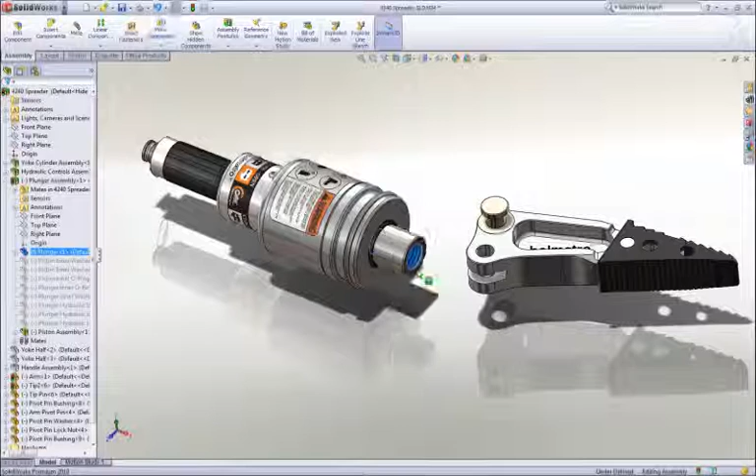We'll create a part, assemble several parts, and create some drawings. We'll start by designing a new rod-end part to connect the piston rod to the spreader arms.

The basic building block of a 3D solid model is a sketch, and sketching in SolidWorks is extremely easy and intuitive. Using a mouse gesture, I get access to my most commonly used commands. Draw a slot, add some dimensions to establish its size, and then drag the center of the slot onto the origin to locate it.

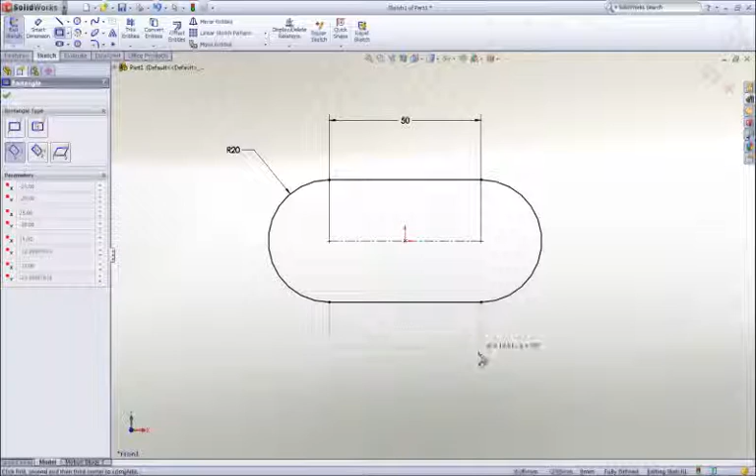Next, a rectangle is drawn using one of the many sketch tools, and then we will add a couple of circles to hold the link pins. The two circles should be the same size, so a quick window selection reveals a pop-up toolbar, and an equal constraint is added to lock their size together.

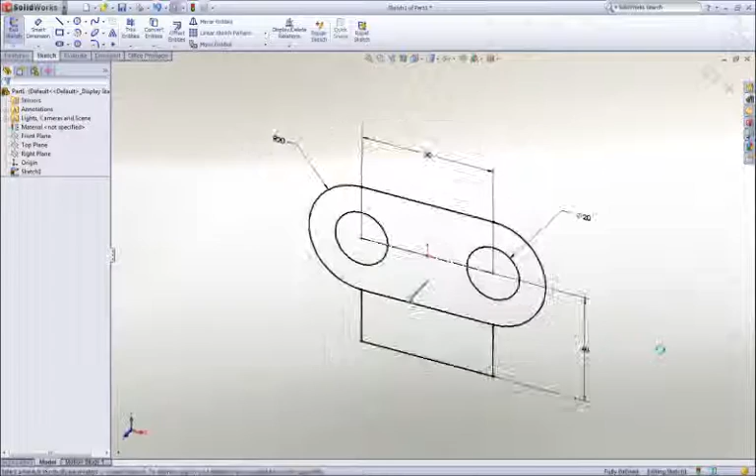Notice that as I work, all of the commands and tools are right at my cursor. We call this our heads-up user interface, which is designed to keep your focus on the screen to make you more productive. Now that this 2D sketch is finished, let's make it 3D by extruding it.

It can be extruded in either direction, or in this case we will extrude it 40 millimeters, about the midplane. To smooth some of the sharp corners, we can add some fillets. Their size can be graphically manipulated on screen, or we can key in a dimension to add some precision.

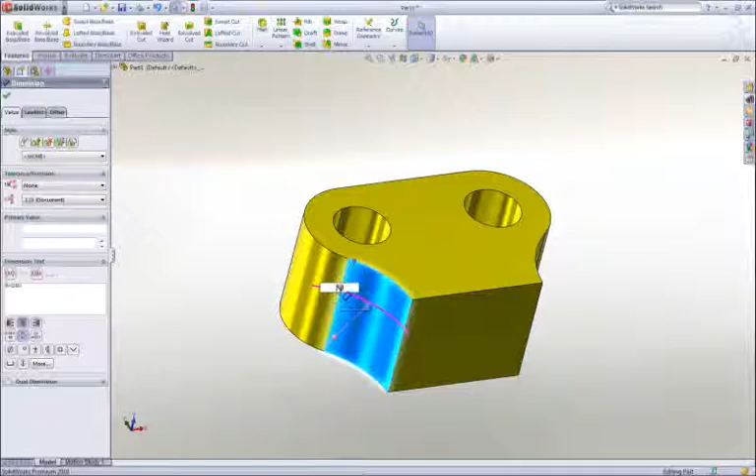Let's add a pocket to the center of the part to accept some links. This time we will use a center point rectangle to capture symmetry while we sketch, and a dimension to control its size.

Using instant 3D technology, we can add material by dragging the sketch away from the part, or remove material by dragging into the part.

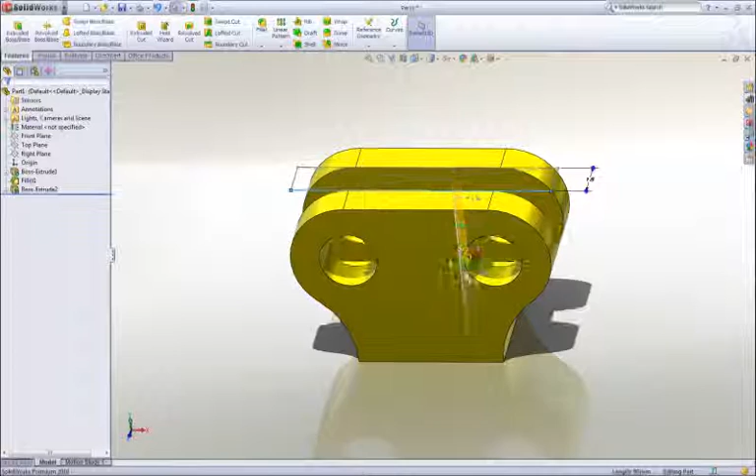The sharp corners at the bottom of the pocket can be rounded by adding another fillet. 2 millimeters would be good. Finally, we can ease the outside corners with a chamfer. Using the on-screen feature callouts, we can easily control its size while we create it.

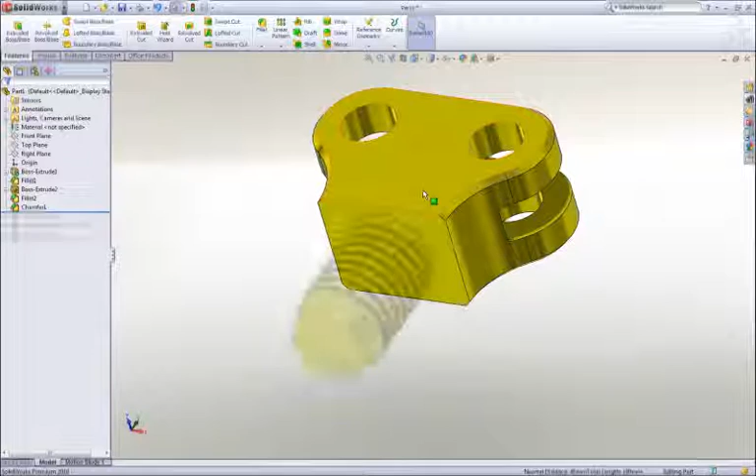Now that you have the hang of it, we will jump ahead a couple features and add a tapped hole at the bottom using the hole wizard. Gone are the days of looking up hole data, because all of the hole types, standards, and hole sizes are available. Choose the hole parameters, locate it, and SolidWorks takes care of adding all of the proper information to define the hole.

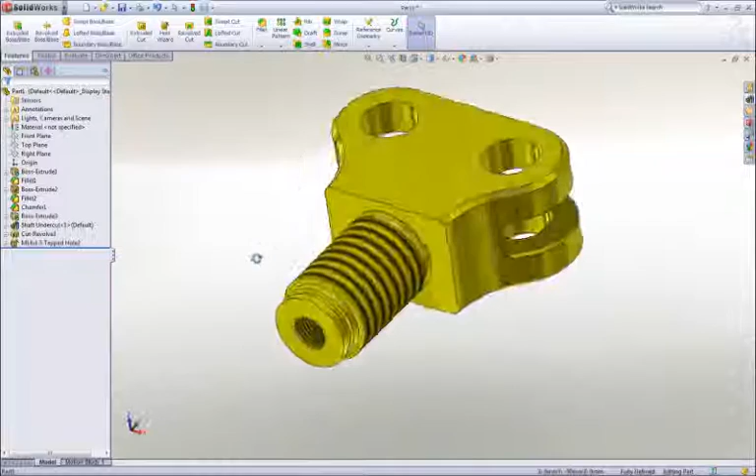Let's leverage our previously created chamfer by dragging and dropping it onto the bottom edge to make a copy. The part looks good, but maybe a couple of changes would help to refine it.

Changing the dimension value changes the geometry, and using instant 3D technology, dimensions can be dragged and we get real-time feedback of our change. It's important that we fully describe our part beyond just the geometry.

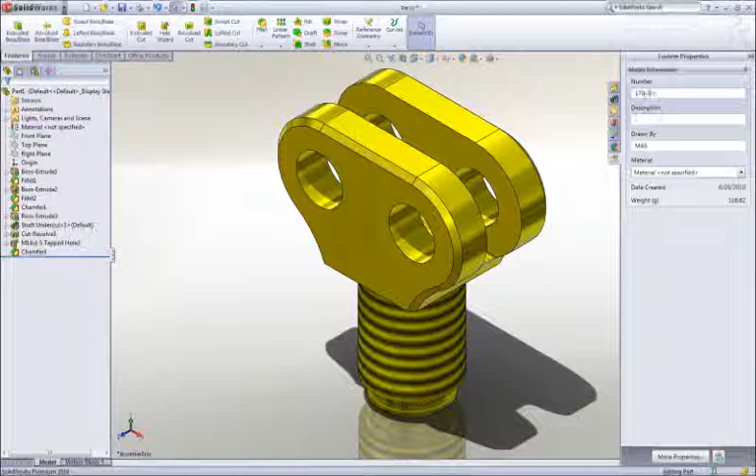Properties such as part number or description can be added and leveraged later in the drawing title block and BOM. Materials can be applied from a list of favorites or from a broad database of materials. All visual and mechanical properties are applied. Notice that the weight of the part has been updated to reflect the new material.

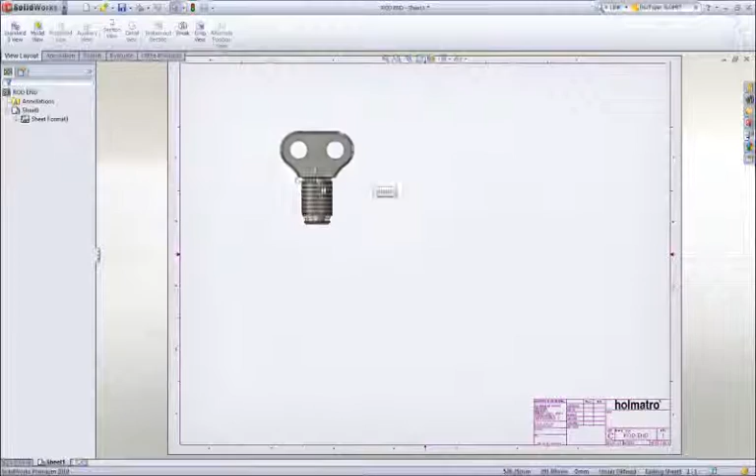To document our design, let's create a drawing. SolidWorks displays the default views of the part in the View palette. We simply drag a view onto the sheet, then we can create any desired projected views, including an isometric.

Hidden lines can be removed or views can be displayed as shaded. For this part, it would be desirable to create a detailed view of the area near the bottom for clarity.

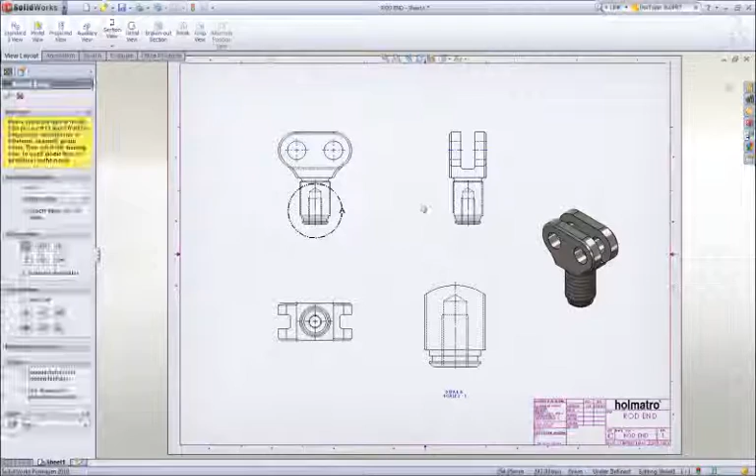Adding dimensions is simple. All of the dimensions that were used to create the part are available to be placed on the drawing. Since symmetry was used during design, we can add a couple dimensions to locate the round boss at the bottom. The Rapid Dimension Manipulator appears to properly place and space the dimensions at even intervals.

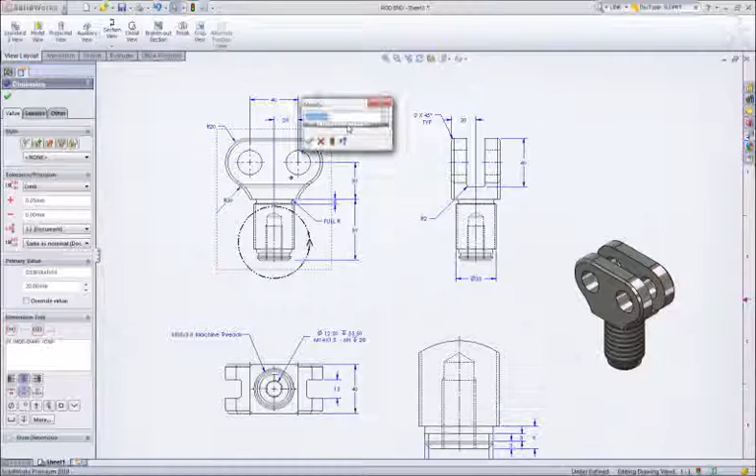Selecting a dimension, we are presented with a dimension palette where we can add more definition, such as tolerancing or formatting. These 20 millimeter holes will not accept the 22 millimeter pins that we will be using. No problem. Making this change right here on the drawing will update all of the views and change the part as well. Let's move on to do some assembly work, and with Solidworks, it couldn't be any easier.

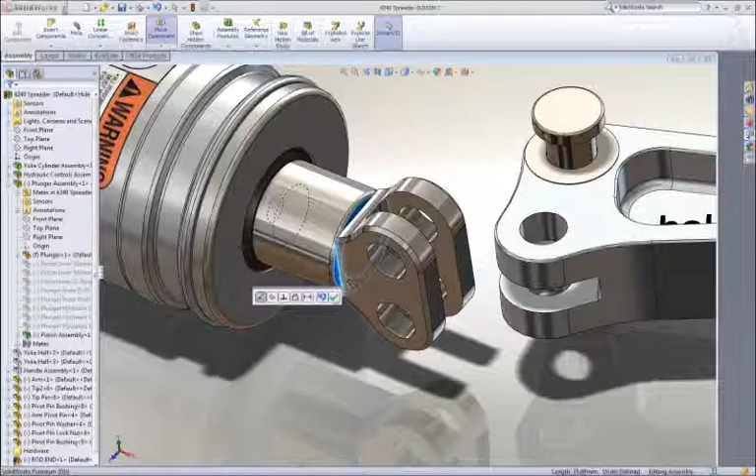For our rod end, simply drag the round boss and drop it onto the cylinder rod. This adds a concentric assembly mate between the parts. To position it along the axis, we can drag the edge of the rod end to the end face of the cylinder rod to add a coincident mate.

Next, we will add a link to stop it from rotating. To find this part, we will enter link in the search assistant. Solidworks not only returns components with link in their file name, but also digs down into the part properties to find the term. As before, we can drag this link from the search pane and drop it on a circular edge of the arm to locate it. Then using the same drag to mate technique, we can hook it to our rod end.

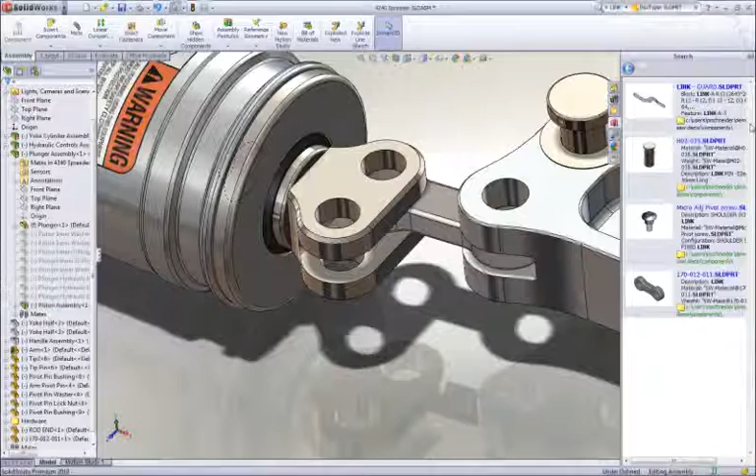From the same search pane, we can assemble the pin. This pin was modeled for multiple uses and contains many sizes or configurations. We simply choose the diameter and length that is desired, and Solidworks builds the part to specification.

Most assemblies contain many hardware items like screws, nuts, washers, and the like. Solidworks provides a toolbox of such items containing thousands of parts with millions of configurations for your use. Notice that as we assemble the snap ring, it automatically sizes itself to the shaft on which it is placed.

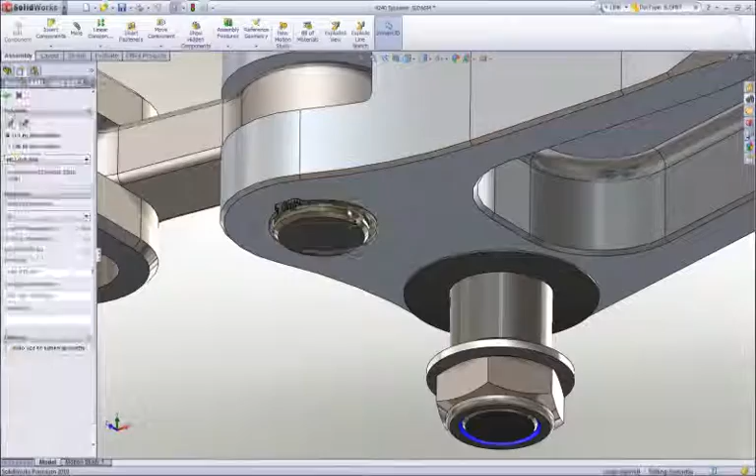Solidworks allows us to copy parts along with their mates, which is a big time saver. Simply identify the hole and mating face for each hole where the pin is to be placed.

As you can see, these pins are too long for the rod end. Remember, the pin was modeled in multiple sizes, so we can easily change the length of just these two without having to reassemble.

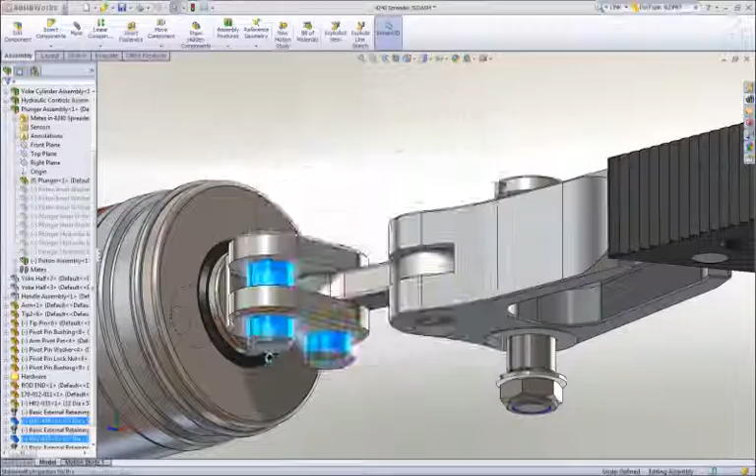Interference detection is an important aspect of 3D design, and Solidworks takes it a step further with real-time collision detection. Notice that as we move the arm through its range of motion, it interferes with the link. Solidworks provides both visual and audible feedback of the collision.

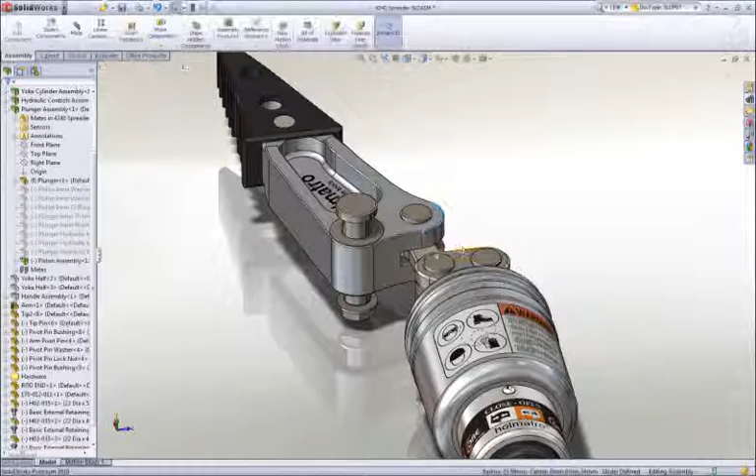A change is in order, and it can be done directly on the part right here in the assembly by changing the angle dimension defining the pocket on the arm. Now, as we recheck for collision, we can see that we have full range of motion with no interferences.

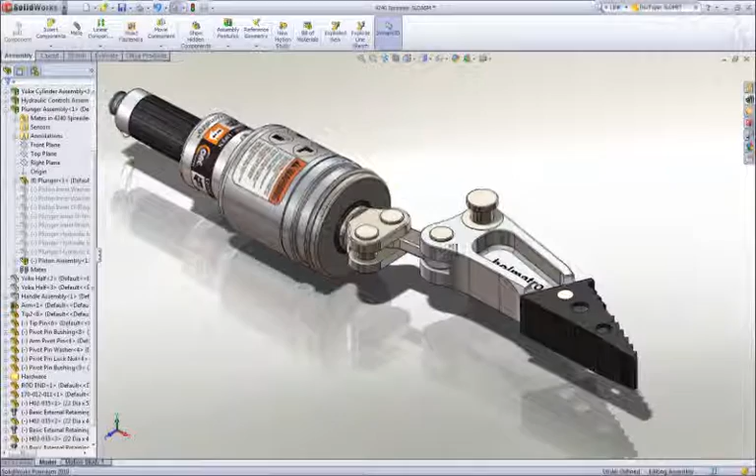Half of the spreader is complete, and we can save assembly time by mirroring the parts about the central plane to the opposite side. Solidworks allows us to verify and change the position of each part, and even to create opposite-hand versions of individual parts.

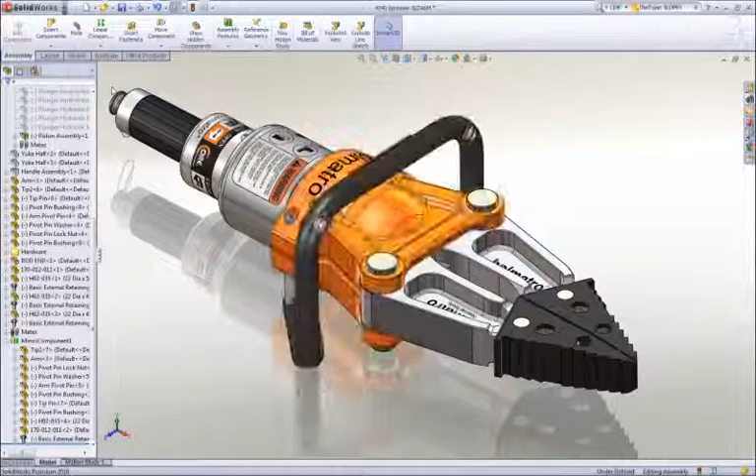In just two minutes, there were 19 parts added to this assembly, and our assembly task is complete. Let's turn on the parts that we have previously hidden and document this assembly. We'll wrap up the demonstration by creating an assembly drawing.

As we did when creating the part drawing, we can drag the required views onto the sheet. To better describe this spreader, we will use an exploded view of the assembly.

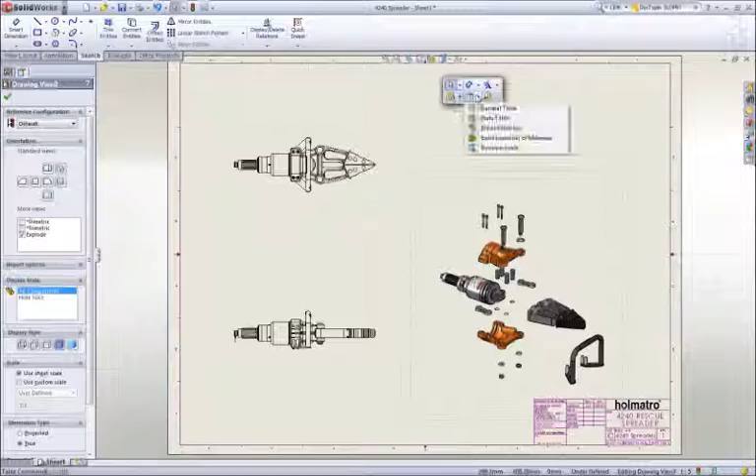No assembly drawing is complete without a bill of material. Solidworks itemizes the parts, extracts information like description, and adds the appropriate quantities. No bill of material is complete without balloons, and they can be added automatically.

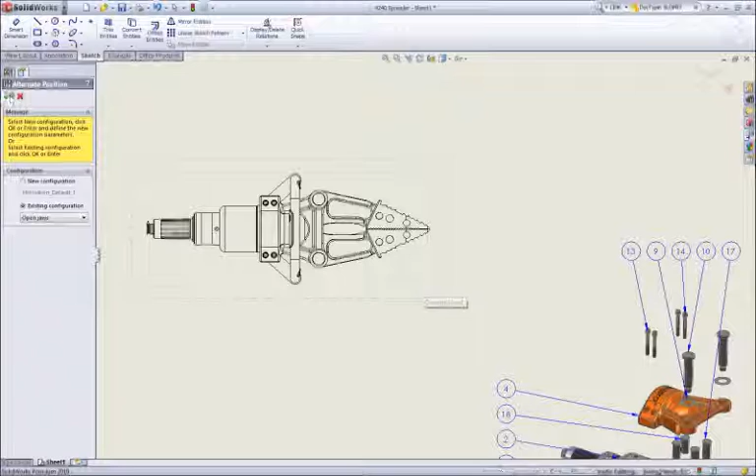To depict the motion of the spreader assembly on a 2D drawing, we can add an alternate position view to describe the assembly in both the open and closed positions. Add a couple of reference dimensions, and our assembly drawing is complete.

We strive to deliver simple but effective tools to help you design better products faster. When you have an idea for a great product, Solidworks provides the tools to design it in less time and at lower cost. This has been your first look at Solidworks. To learn more, contact your local Solidworks reseller or explore our website for more information.